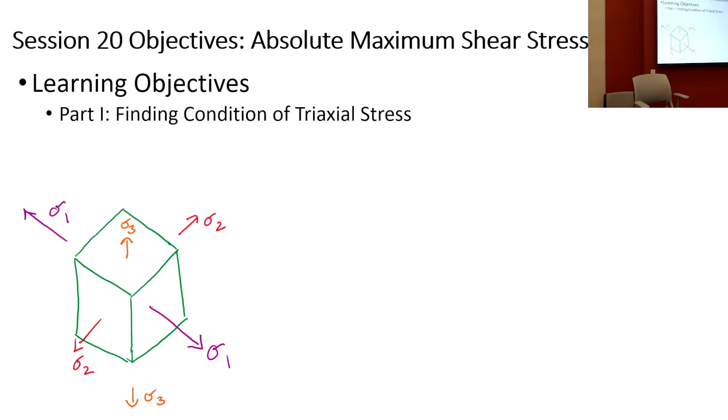For the one or two people that came to office hours asking, hey, do we have to do eigenvectors and eigenvalues, it's like, okay, not really. But this is for your good-to-know file. When you take the graduate class on mechanics, or a more advanced class on mechanics, or aerospace structures or aerospace materials, you'll be like, oh yeah, I remember that thing about tensors. So you can be like, oh yeah, I've heard of tensors, even though I don't really know what to do with a tensor.

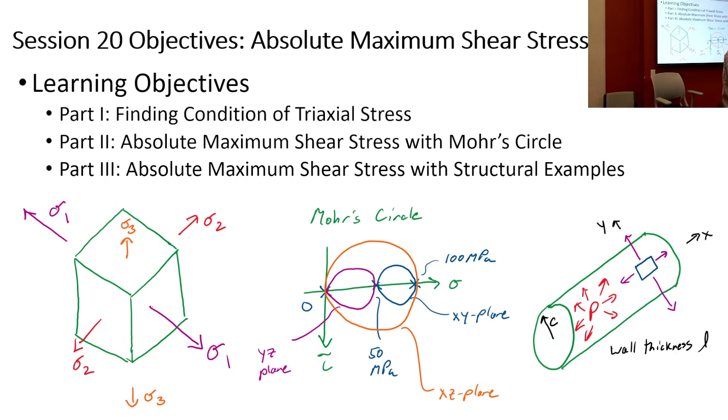So we'll talk about triaxial stress, and then we'll get into calculating absolute maximum shear stress with Mohr's circle. This topic is important. It will be on the final, and most likely on Tuesday's exam. If it doesn't quite gel, ask questions, revisit and work on the problems, or ask your neighbor when it's time. And then the final thing is that we'll say, here's a structure, and if you've got a material element on that structure, how do we calculate the absolute maximum shear stress on that element at that location?

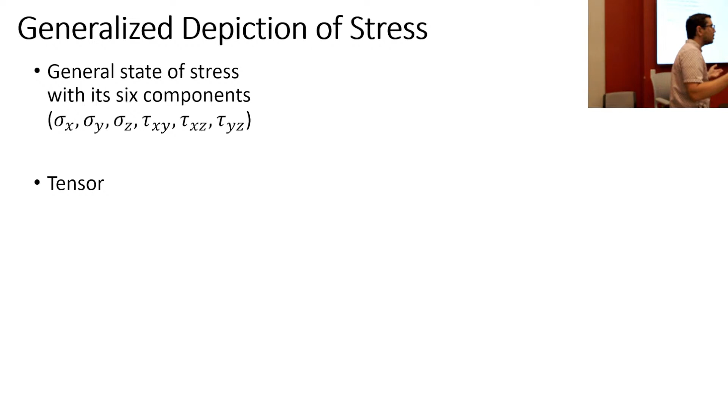So first, a couple of slides that are kind of review. Do you remember this? We said that we could depict state of stress with 6 parameters: sigma x, sigma y, sigma z, tau xy, tau xz, tau yz. And we can also put these in a 3x3 matrix, which we call a tensor.

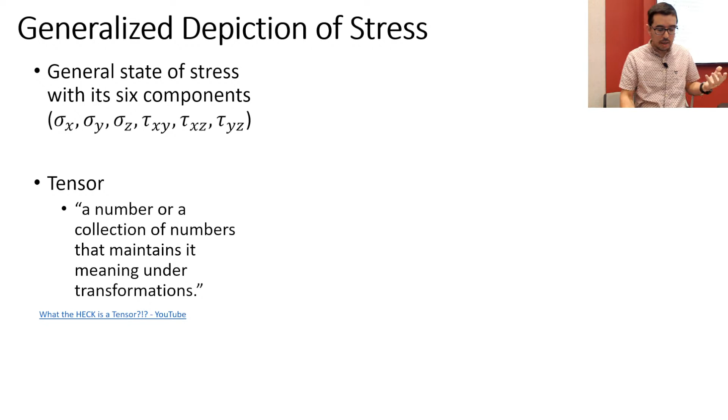What is a tensor? You can watch a nice YouTube video on that. But essentially, even though we talk about different states or conditions of stress, as we orient, transform, or rotate an element at a particular location, the information is all preserved. If you rotate by 45 degrees, then 15, then 5, and so on, you can eventually work your way and figure out the state of stress at this particular orientation versus that location. So that's one of the things that makes a tensor.

And then, as you recall, we can put these stresses on the faces of a cube, a material element. Now, one thing to keep in mind: we've talked about beams, and we do method of sections. When we do method of sections, we say, oh, there's this internal shear force, or there's this normal axial force. If we took a slice there on that face, there's the shear force, or there's the axial force coming out of that internal surface — that would correspond to what we call a traction vector or a traction force.

The stress is sigma 1, sigma 2, or sigma x, sigma y, sigma z, and all these taus. These are stresses — of course they're not forces, but they're essentially dot products of that traction vector with the x, y, z coordinate system, divided by the area. I know this is a little abstract, but that's how you can think of it: there's that internal shear force on a face, and if I do a dot product with the vector I'm interested in, I'm going to get the stress.

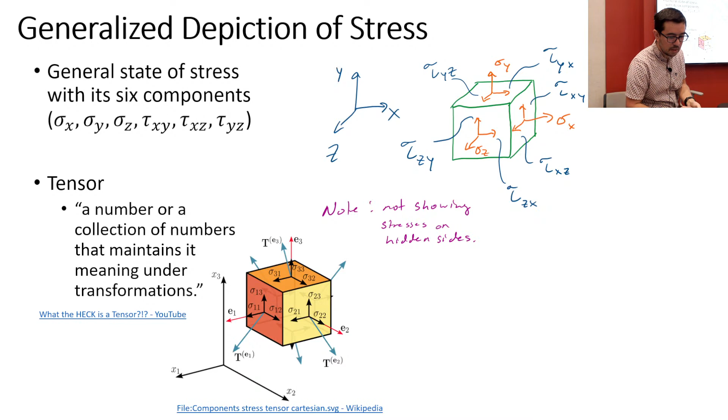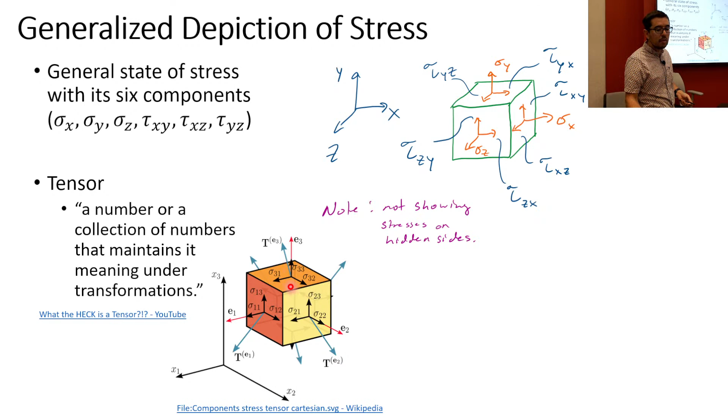So these traction vectors — let's do this. These are traction vectors, see, like this T. So that's kind of like an internal shear force or an axial force. But then we have corresponding sigmas, stress components that are based on this traction vector, but dotted with an E3 or E2 or an E1 to get these relationships.

Now, the stress tensor — you can look up the Cauchy stress tensor if you like — has this form. We've also seen that this form can be a little confusing when we do finite element analysis, and we had to, in some cases, look at the shear strains and be a little careful about them. Those are the strains, and these are of course the stresses. But the stresses map very nicely over to what we've been using here.

Any questions up to this point? This is kind of a review, and you can go back to session 3, I believe, which is when we started covering stress and strain.

Now, what's next? We said just a second ago that we can have this interesting configuration of stresses, conditions of stress on an element. That's really neat, that's cool, right? That can be very confusing, of course. If you've got all these shear stresses, sigmas, it's like whoa, what's going on with this element? Maybe it's not that confusing though. I mean, there are really only 6 components.

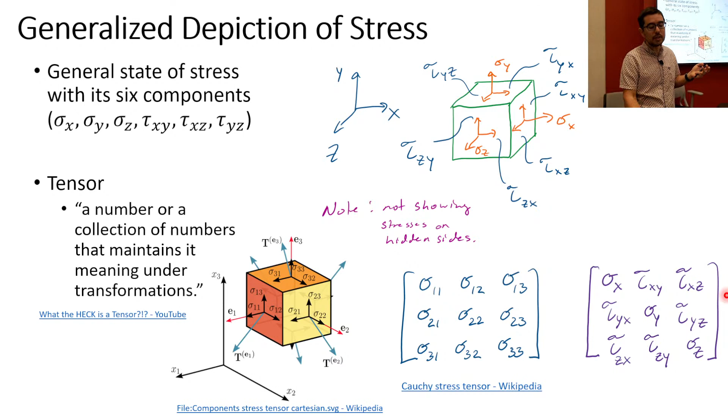But what's cool is, just like we've done with a 2D square, we can also find a 3D orientation. Remember, we're finding the principal stresses. So you've got a 2D state of stress, what we call plane stress, and then we rotate by some amount, and voila, all the shear stresses disappeared. That's the state of principal stress, or principal stresses.

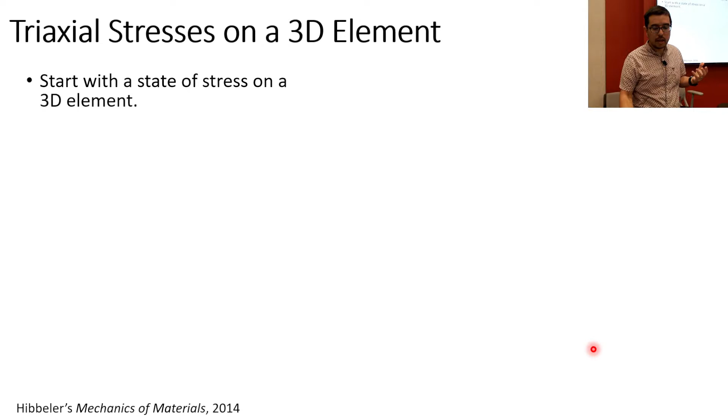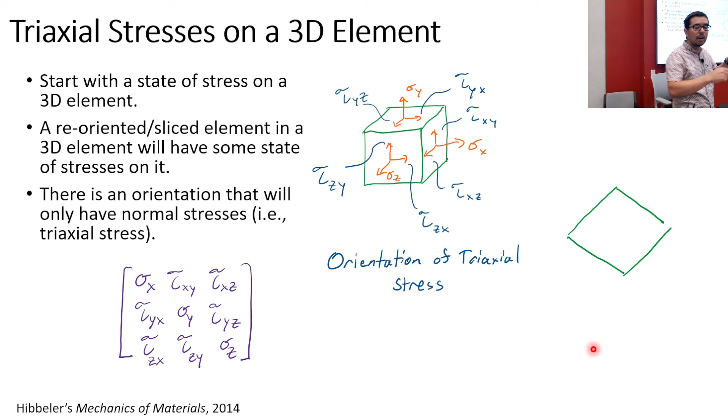So the same thing happens in 3D. You can start with a state of stress on an element like this, and we can rotate by one or two axes and find a state of stress that only has the normal stresses coming out of it, or only has principal stresses coming out of it. So this is obviously a little bit easier to understand, right?

It's like, oh okay, I got axial stresses, I can kind of think of that. So my taus go away, and my tensor ends up looking like something that has sigma 1, sigma 2, and sigma 3. It's just going to put them on the main diagonal, as you see here. And the other components, those are going to be zeros, and of course those other components would be the shear stress.

So would I ask you to do this? Kind of, maybe, sort of. Because we're going to use Mohr's circle essentially to look at some of these 3 stresses, sigma 1, sigma 2, sigma 3. And if I start with a plane stress element, it's actually not that hard to do. The convention we follow - and I got it flipped this afternoon when I was typing in the group meeting - it's like, oh, sigma 3 is, or I said sigma 1 is equal to 0. Actually, usually sigma 1 is the largest, sigma 2 is next in line, and sigma 3 is next in line. So sigma 3 is often 0, especially when we're dealing with a case of plane stress.

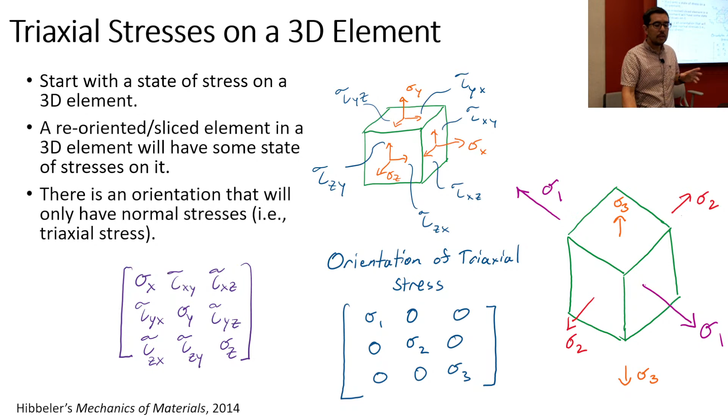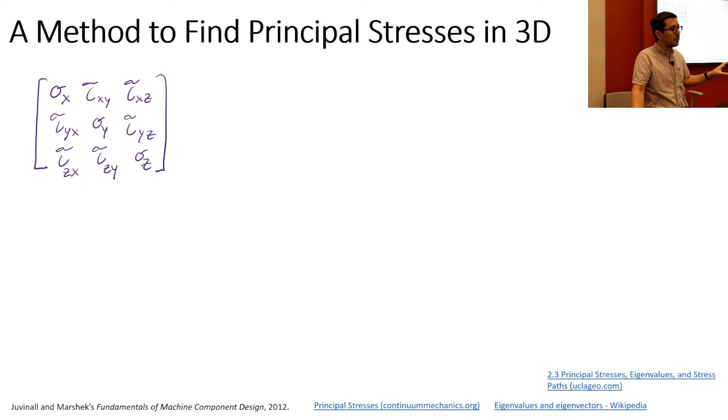So now this is a method to find principal stresses in 3D. You would not have to use this method on an exam - you would use Mohr's circle on the exam. But nonetheless, I think it's good to get exposure to this, so then once again you're like, oh yeah, I know how to kind of manipulate tensors. I know how to do a little bit of this.

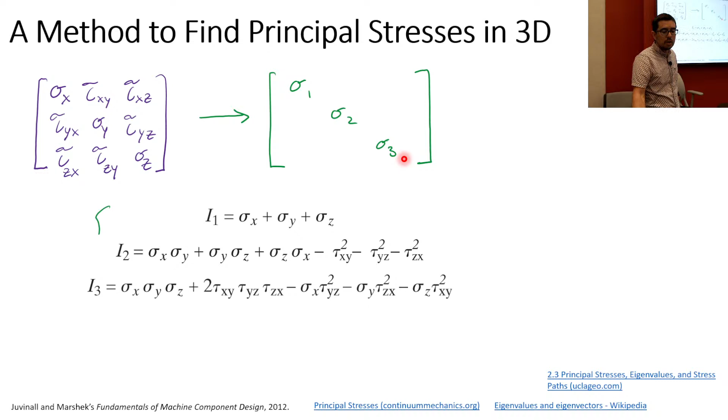So our goal is to go from this general state of stress, where we're assuming that we have non-zero taus in the tensor, and we want to get sigma 1, sigma 2, sigma 3, and zeros everywhere else. So what you do, or one way to do it, is you calculate the invariants in an eigenvalue problem. Don't worry, it's just jargon for now. But if you do linear algebra, this is like A lambda equals I, and then you figure out these invariants, and I would be that column vector.

So anyway, you can calculate I1, I2, and I3, and sigma - see, what order is this? This is a third order polynomial. So how many roots would it have? Three roots, which is good because we need three - we need a sigma 1, we need a sigma 2, and we need a sigma 3. So the math works out that you can get your three components by solving for the roots of this equation, where I1, I2, and I3 are these invariants.

And what's cool is once you have these principal stresses, you'll see in a brief moment it's very easy to draw the Mohr circle. Once you have sigma 1, sigma 2, sigma 3, it's very easy to draw Mohr circles - multiple Mohr circles, I should say, because now we're going to have multiple Mohr circles on our sigma tau plot.

And if you've done that, we can figure out what the maximum shear stresses would be in those given planes.

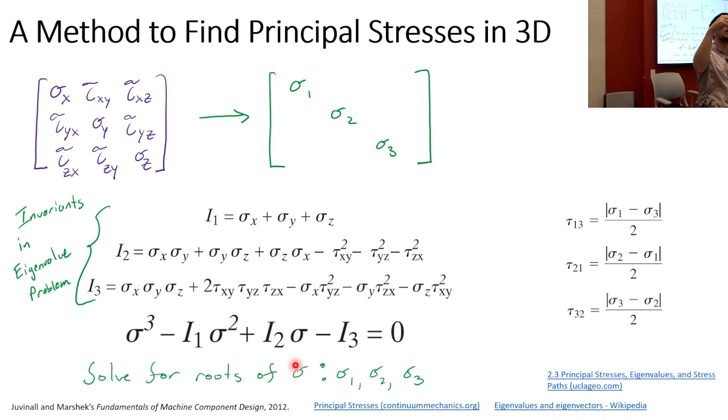Those are called invariants. And so when you do the eigenvalue problem, you can have like an identity matrix, or... actually, no, I'm wrong. They're just invariants. Let it be, they're just invariants, yeah, sorry.

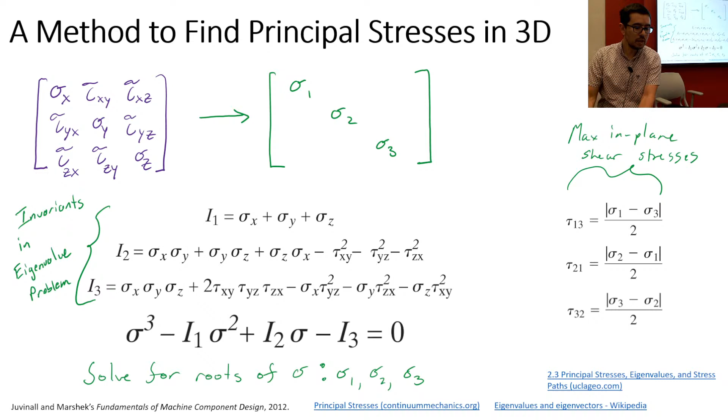Okay, now I want to show you something here. When we do this example, let's say we have sigma x equals 100, sigma y equals 50, and tau xy equals 10 megapascals. The other stresses are 0.

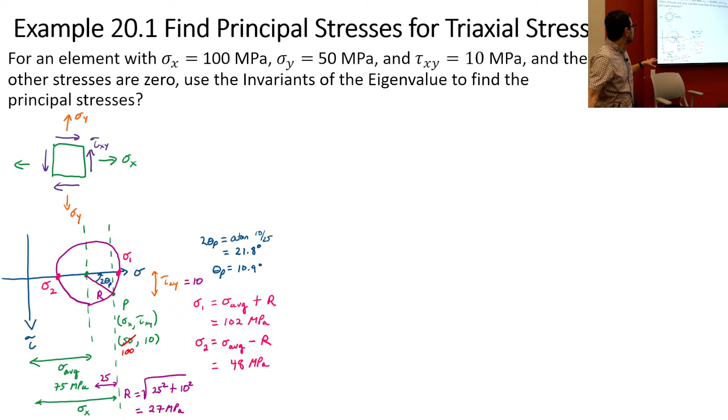And so we're going to use the invariants of the eigenvalue problem to find the principal stresses. So, we can go ahead and draw out the Mohr circle. All right, that's all fine. That depicts a state of stress. That's all happiness, no problems. And we can find sigma 1 and sigma 2 doing this.

If we want, all right, so if you go... let's see here. Whoops, I don't want to do that. Okay.

Just so that, even though it's not fair game for the exam, it is fair game for the homework. But don't sweat it, because it's not going to be that bad.

If you go down to the Colab that's available, right here... password reset started. Ooh, that's dangerous. Okay, I don't want to do that.

All right, well, I'm going to go ahead and run this first. We know how to do this. And essentially, all you've got to do...

Oh, sorry, thank you, Chris. That was you, Chris, right? Thank you. A different Chris is saying you're welcome? Nice, guys. All right, thank you. Thank you for keeping it down, guys. I appreciate the lower decibels.

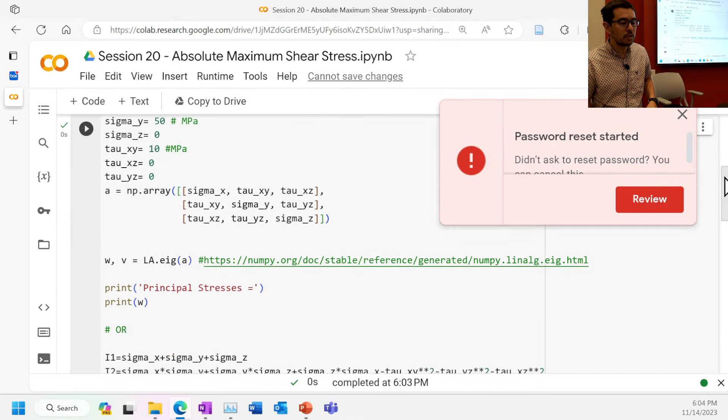So what you do is you just plug in, you're just going to plug in for sigma x, sigma y, sigma z, tau xy. You're just going to plug in the state of stress here, and let Colab run its magic. So in doing that, this is the tensor that you have.

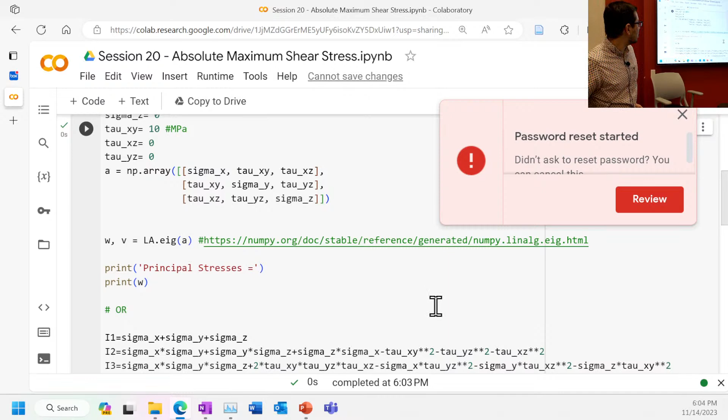And then what we're going to use is the eigenvalue solver from linear algebra that's embedded. Or you've got two ways of looking at this. You can also use the invariants. These big formulas, they're all there, so there's no reason to type them out again.

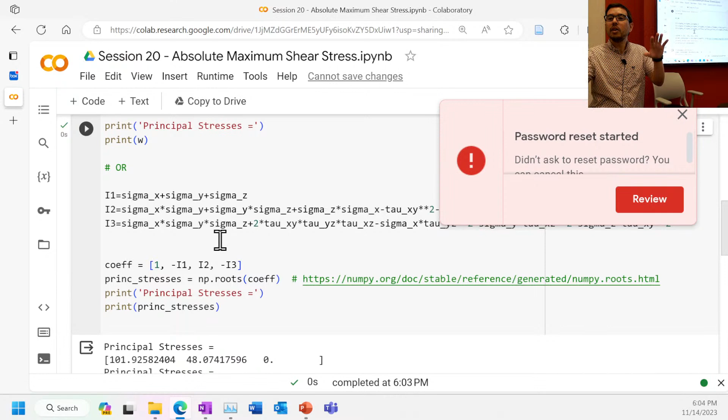And I know some of you love MATLAB. MATLAB is great, I spent many years using MATLAB. So if you really want, you can copy and paste this into MATLAB. Why? Because all you've got to do is hit Control Enter, or hit the green button, or hit the little thing.

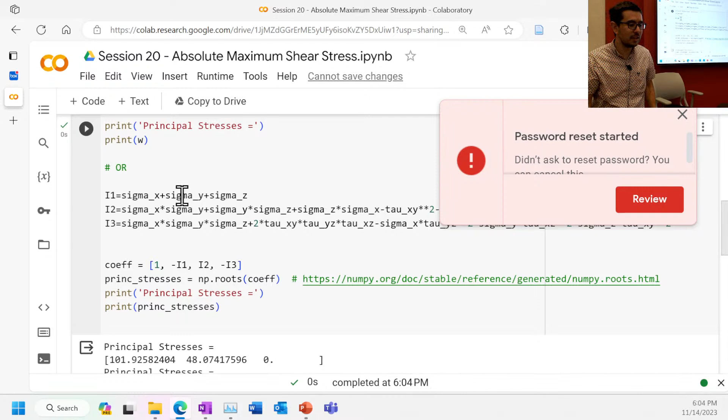So you hit it and see, it tells you what the principal stresses are. It does that calculation for you.

So in case someone says to you on the subway or the train, hey, I got a tensor here with sigma x equals this, sigma y, you just pull up this Colab and figure out the principal stresses, man, or woman, or person. Don't you think this is useful? Why is this stuff useful besides being a smart aleck on the subway?

Yes, Federico, are you recovered? I miss you down here, but what's up? Why is this important? The Colab? Why is calculating these principal stresses important?

We've been doing this now, right? And I probably, is it my fault? It must be me. The reason you don't know why this is important is my fault.

Some materials, the brittle materials like ceramics, fail because of maximum normal stresses. And what are the maximum normal stresses? The principal stresses. So you can have an interesting state of stress, and you're like, if it's a brittle material, is it going to fail? The way to answer that is I've got to calculate the principal stresses, and then do some other stuff we'll talk about soon regarding the criteria for failure. The short story is these maximum normal stresses are what are going to sink you, so you want to make sure you can calculate them.

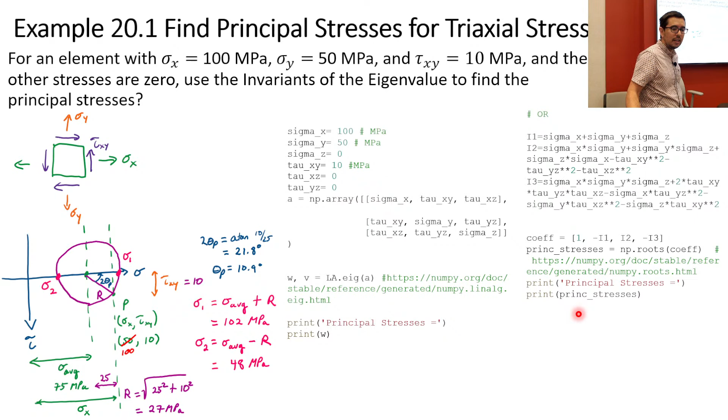So that's how we calculate the principal stresses, and on your homework you'll get to do this. All you have to do is use the code, plug in these principal stresses, or better said, plug in this state of stress, and then you get the principal stresses.

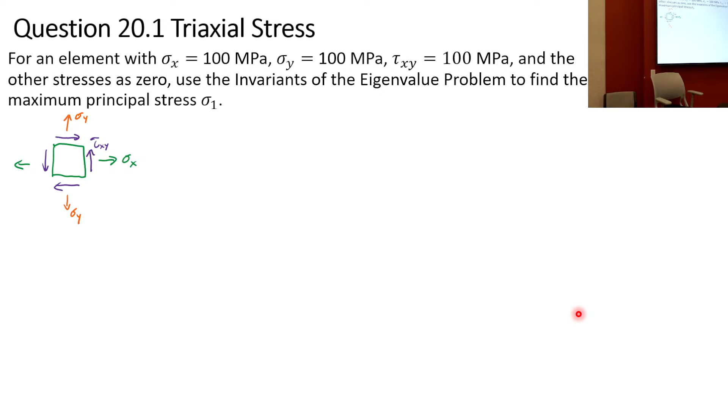Okay, if you were asleep, I invite you to just wake up, because this is important stuff, alright? Okay, and this is a little bit of a mind bender.

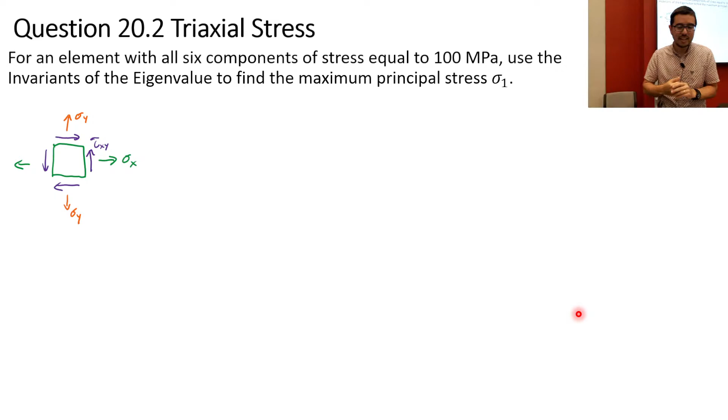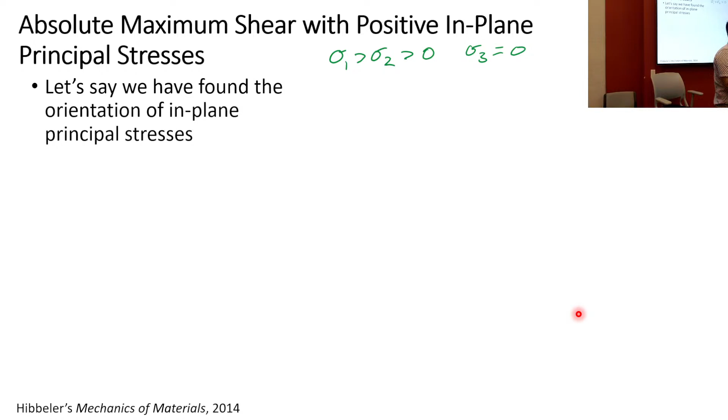Let's say we have the principal stresses, okay? Let's just say we've got sigma 1, sigma 2, sigma 3. And we're going to say this is for in-plane, which means that the normal stress coming out of the blackboard at me is 0. Okay, so that means sigma 3, that's going to be the lower one, the smallest, that one's 0. So we really have sigma 1 and sigma 2.

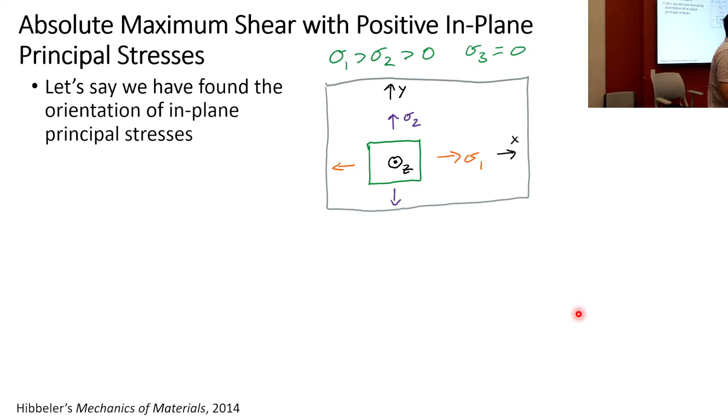And let's say that sigma 1 is aligned with the x-axis, like this, and sigma 2 is aligned with the y-axis. Alright? Everyone's got this image? Super easy peasy, okay? If I draw the Mohr's circle, okay, it's going to be a circle. Okay, so like circle. Alright, and what does it look like? It looks like this, right?

Everyone agrees with this? Sigma 1 is something, sigma 2 is something. Easy peasy, lemon squeezy. Now, did I draw the sigma 3 here? It's there, I drew a sigma 3 here. So what's going on with that?

Now let's rotate our perspective. What are we doing? We rotated 90 degrees about y. So the y-axis, right-hand rule, 90 degrees. That means the x that was on the right side is now into the board. And now we just look at the state of stress in that plane.

And what do we see? Well, we see the sigma 2 still. But sigma 1, which was in the x direction, has vanished. It's just vanished. It's there, but I don't see it in that plane.

But if I were to draw this circle, if I draw the Mohr's circle just by what I see here, what does it look like? Well, sigma z is 0, right? Sigma 3 is equal to 0, so it's just going to be the circle here, like this. Everyone see that?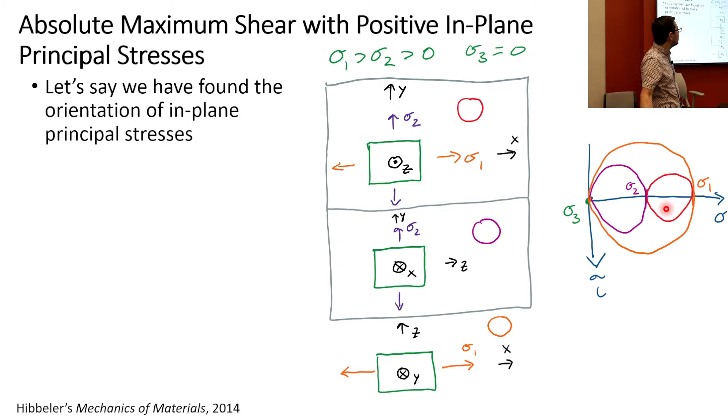So, last week, when we said maximum in-plane shear stress, and I gave you this planar element, what did you say? You came over to this red circle and said that's the maximum shear stress. And we call that maximum in-plane shear stress.

But now we've got a 3D depiction. We've just rotated the element. What is the absolute maximum shear stress in this case? Which circle does it correspond to - the red, the purple, or the orange? The orange, right? It's now down here.

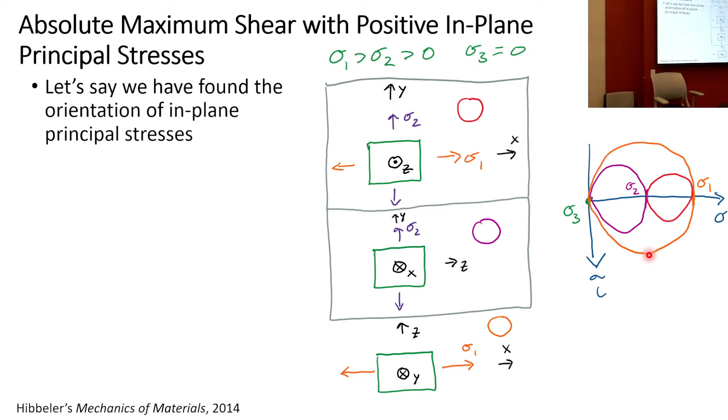So it's the same state of stress, or one of the same states of stress that we've been talking about, but the absolute maximum shear stress is based on what's happening in all 3 dimensions. So when you do this problem, what you do is plot sigma 1, sigma 2, sigma 3, and then draw all 3 of these circles.

If you're interested in the maximum in-plane shear stress for the 1-2 plane, it's here. If you're interested in the maximum in-plane shear stress for the 2-3 plane, it's here. If you're interested in the maximum in-plane shear stress for the 1-3 plane, it's here. If you're interested in the absolute maximum shear stress, it's here.

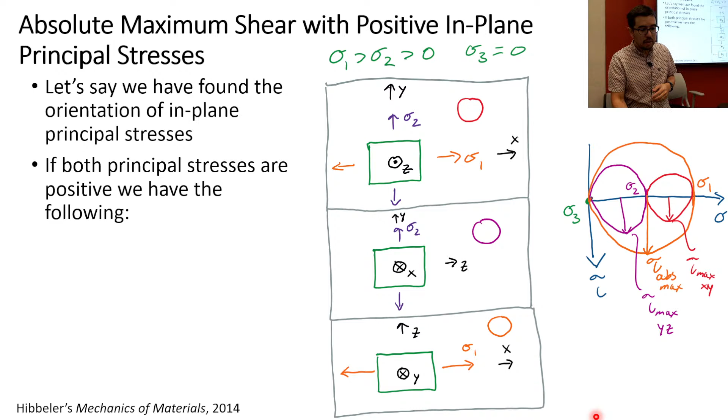Okay, now we did all that, but there are formulas, all right? So you're gonna write these down, and you're probably not gonna use Mohr's circle in some cases, but I encourage you to at least know what to do with Mohr's circle. So the rule is, if both principal stresses, assuming plane stress, are both positive, then what you do is sigma 1 minus sigma 2 divided by 2, for tau max xy, and we already did that, right?

And for tau max yz, you just do sigma 2 divided by 2, and that's what we just did. And if we want the absolute max, then we just do sigma 1 divided by 2. So you could write this down and not draw Mohr's circle, and just put these equations down. But I think Mohr's circle makes this a lot simpler.

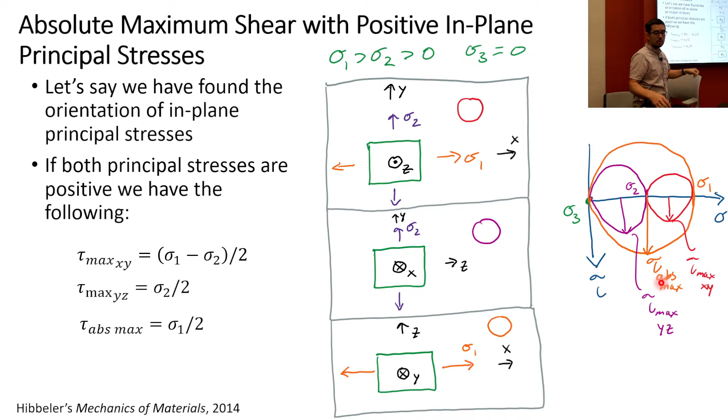Okay, now what happens if one of these stresses is negative? When I say one of these stresses, I mean what happens if sigma 2 is negative? Remember how I was saying that sigma 1 is typically greater than sigma 2, which is typically greater than sigma 3? This is one of those cases where we're going to peg sigma 3 on the origin, and sigma 2 is actually going to be less than sigma 3. It's a little bit odd, but it is what it is. You could maybe say that the absolute value of sigma 1 is greater than the absolute value of sigma 2, which is greater than the absolute value of sigma 3, maybe. But typically sigma 1 is the most positive. So what happens in this case?

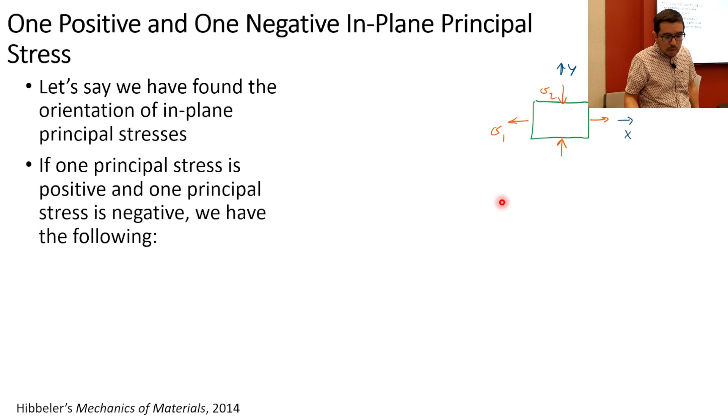Well, if we draw the Mohr circle, here's sigma 1, here's sigma 2, and this is the Mohr circle. What is the third principal stress? Well, if it's like what we're talking about, where sigma 3 is equal to 0, or sigma z is equal to 0, then we're gonna peg another stress at the origin, and we can start to look at these different planar states.

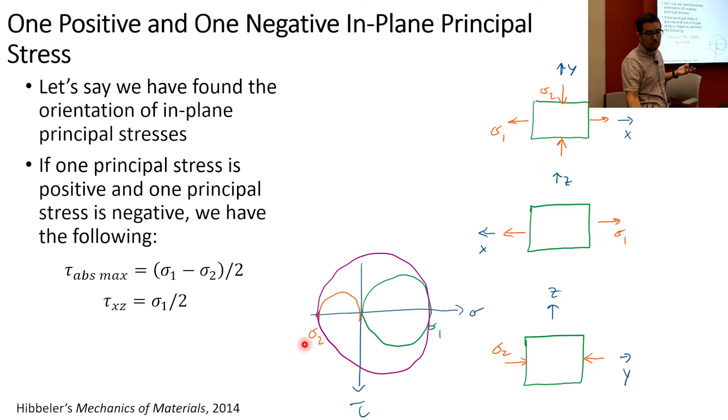Same thing we just did, where we rotate about different axes, and we see, oh, in this case we just have sigma 1 and a 0, so that gets there. And in this case we just have sigma 2, which is going to give us this Mohr circle here with the 0, and we get these. So in this case, if one is positive and one is negative for a state of principal stress in a plane, assuming that sigma 3 is equal to 0, we just use the maximum in-plane shear stress for the 1, 2, or in this case, x and y. So there's no difference between the absolute maximum shear stress and the maximum in-plane shear stress, at least in the xy plane.

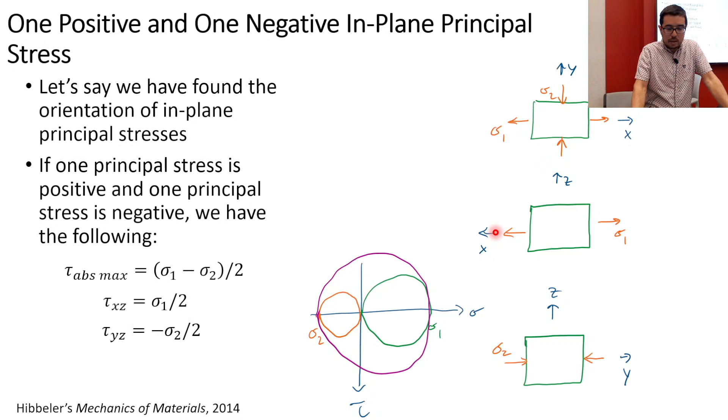Is that case like for I-beam? Okay, good. So Chris, is this only for I-beams is the question - no, like the negative and then the positive stress case. Oh, is it?

Oh, I see what you're saying. No, it's not only for beams, you can have other cases. Like I could just take this block of material and pull it in this direction while pushing it in this direction. That'd give me a sigma 1 that could be positive and a sigma 2 that could be negative. This isn't a great example because it's flimsy, but that's the idea.

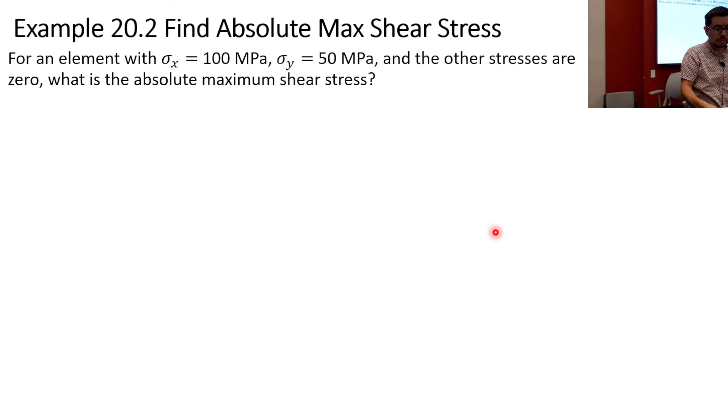Here's an example where we want to find the absolute maximum shear stress. We're given sigma x equals 100 megapascals, sigma y equals 50 megapascals, and the other stresses are 0. That's nice, that's a state of principal stress, because all the shear stresses are 0. So sigma 1 equals sigma x is equal to something.

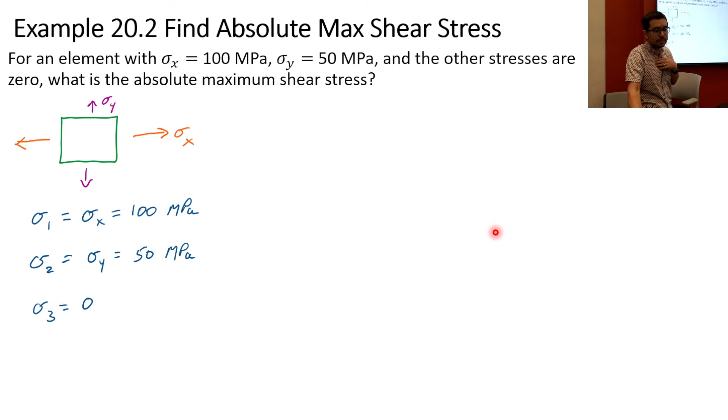Sigma 2 is equal to sigma y, so sigma 2 is equal to sigma y, is equal to 50 megapascals, and sigma 3 is equal to 0. So we draw the Mohr circle, and we have our two stresses on this first circle: the 100 megapascal one here, the 50 megapascal one here. We can go ahead and draw a Mohr circle there. These kinds of problems are actually kind of fun, to be honest. It's like kindergarten, you're just drawing circles.

This is the XY plane, but we know there's a third stress, sigma 3 equals 0, which means we've got to put something here at the origin. So yes, we can have fun and draw this YZ circle, but we know that's not going to give us the absolute maximum shear stress. The absolute maximum shear stress comes when we draw the big circle between sigma 1 and sigma 3. The diameter, that was just 100 megapascals, and so the radius, that's the 50 megapascals. We go down here, and voila, we're going to have a tau absolute max of 50 megapascals. Pretty straightforward, right? Fun?

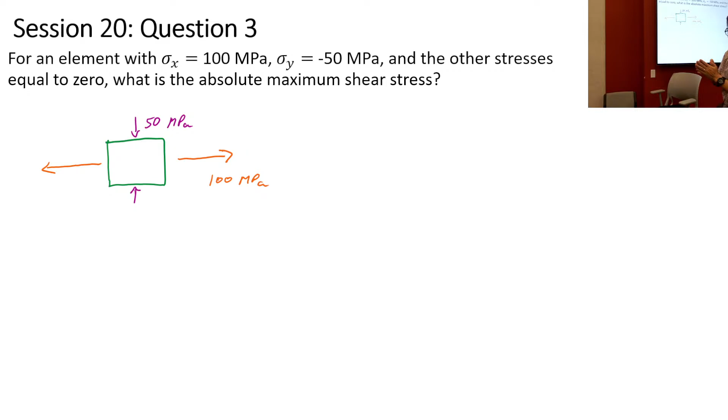Okay, now the finale. All right, we're good on time. We're going to connect, so now if we can get back down, we can calm down again. All right, so now we're going to connect what we were doing to structures, okay?

We can look at, for example, a spherical pressure vessel, right? Now you remember from the last homework, what was fun about the spherical pressure vessel? If you looked at the Mohr's circle before, what was it, for just the in-plane stresses? It was a dot - remember, because sigma 1 and sigma 2 were the same, right? So if we remember this, it was just this dot. And if you look at one of the previous exams, this was on it. It's just a dot.

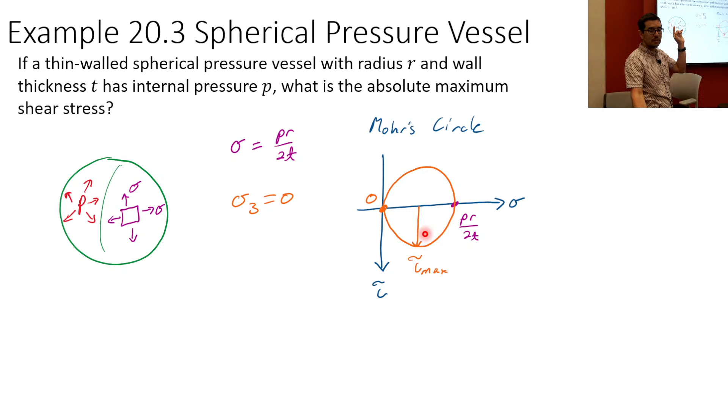But now that we're thinking out of the plane, how would you go about figuring out the absolute maximum shear stress? Is the absolute maximum shear stress 0? Why? Because this is the tau axis and the tau is 0. So I agree that the in-plane shear stress, the maximum in-plane shear stress, is 0. So what is sigma 3 here? It's 0, which means we have another point on the origin, right? Which means that the absolute maximum shear stress is now this radius, and it's just PR over 4t.

So that word, in-plane maximum shear stress, versus absolute maximum, right? If you see the word absolute, then you've got to think out of the plane. If you don't see absolute, ask me on the exam and I'll let you know - okay, that's just in-plane. But you shouldn't have to ask me. If I say max in-plane shear stress, then that's what it is.

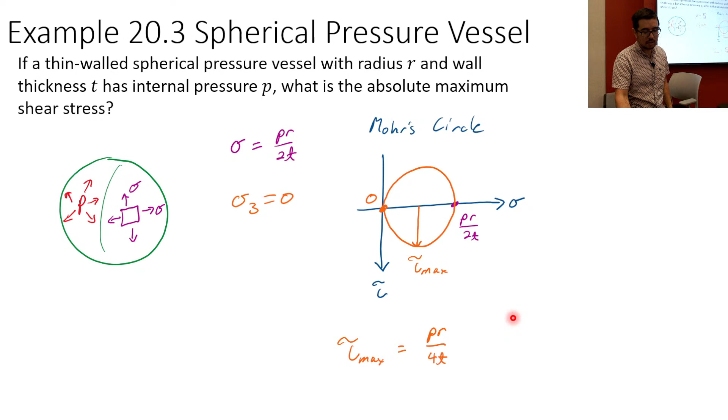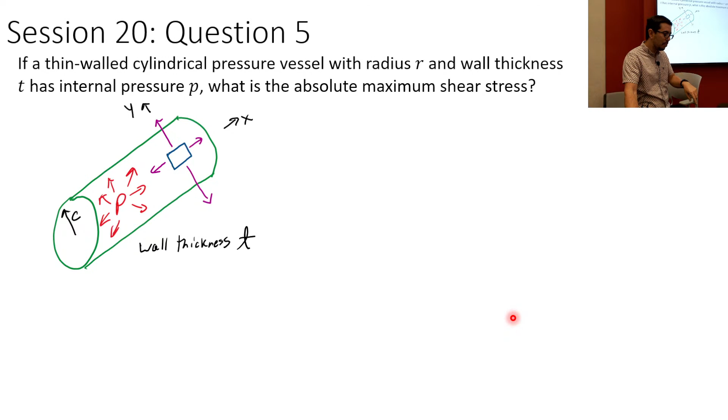Okay, so question 5 is doing a similar thing. I'm going to skip this one - I think you got the general idea, because I think this is important. People wanted to ask about combined loading, so I think I'm going to spend time on that. People are like, how do I do the combined loading? And if you're still asking yourselves questions on how to do this, who are you going to call?

Jeff Hanson. If you don't like how I teach combined loading, just go watch the Jeff Hanson video - I'm not offended. He has a nice video on combined loading. I think, though, that this technique is not bad, the way we're describing it, but sure, watch the combined loading sessions from Jeff Hanson.

All right, so here, what are the forces acting on this system? Good, all right - Py, Px, Pz, all right? And the location of interest is over here, right?

It's hard for me to understand based on these figures - what's the actual location? Which plane is the plane of interest based on these numbers? So A is at the most positive z direction portion of the geometry, in the homework. I agree, it's really hard in general, this is the same drawing, okay - it's not trivial, but I'm here now, so I'm telling you.

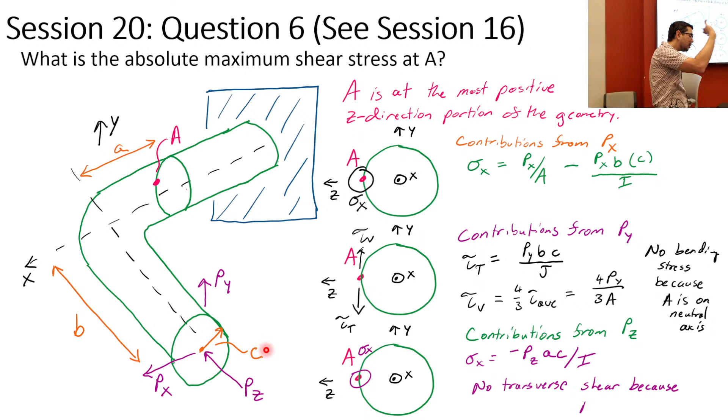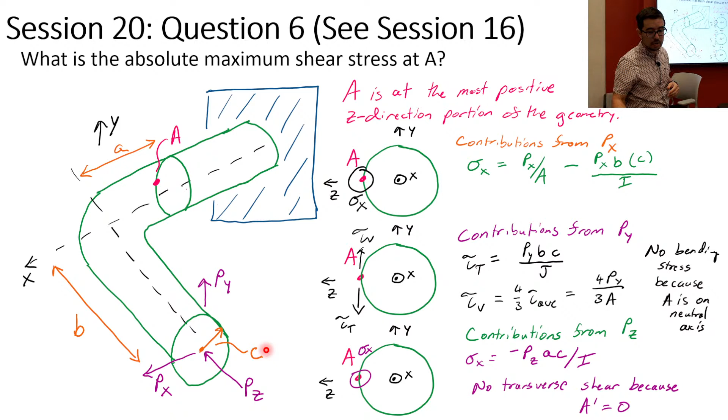So what you do is take this, just copied from the previous slide, and you plug in your A, your I, and your J. Yes, you should write these on your formula sheet. Please do not ask me for these values during an exam. I will say you should have these written on your formula sheet. The way I remember them, I comes before J and I is less than J.

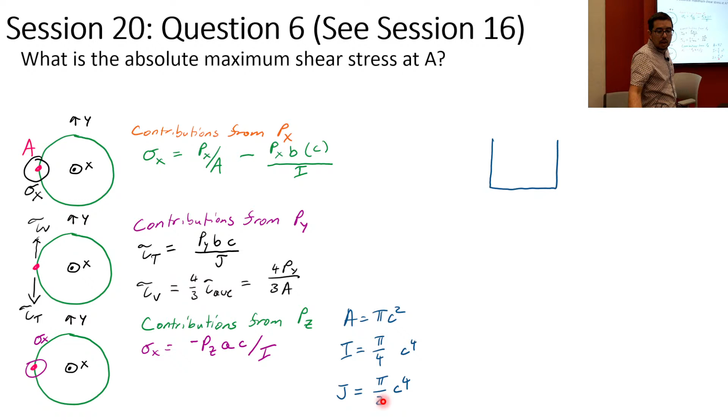So then you draw the state of stress there, and finally, after you've written all this out, you can work the problem to figure out what the absolute maximum shear stress is. And that's the answer, or that will be the answer.

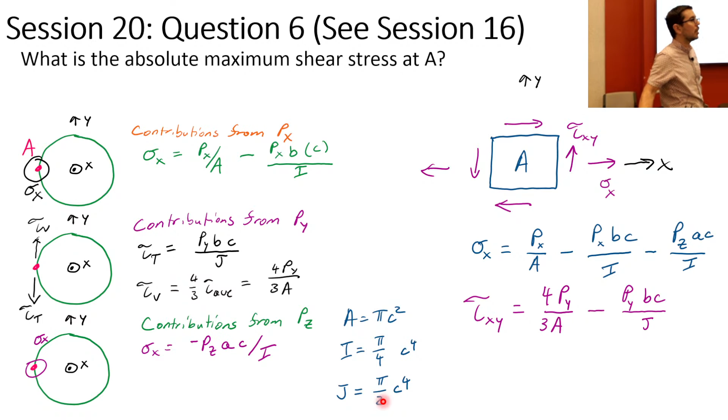So what did we cover today? We talked about triaxial stress, we talked about using Mohr's circle to find the absolute maximum shear stress, and we did a couple examples on actual structures.